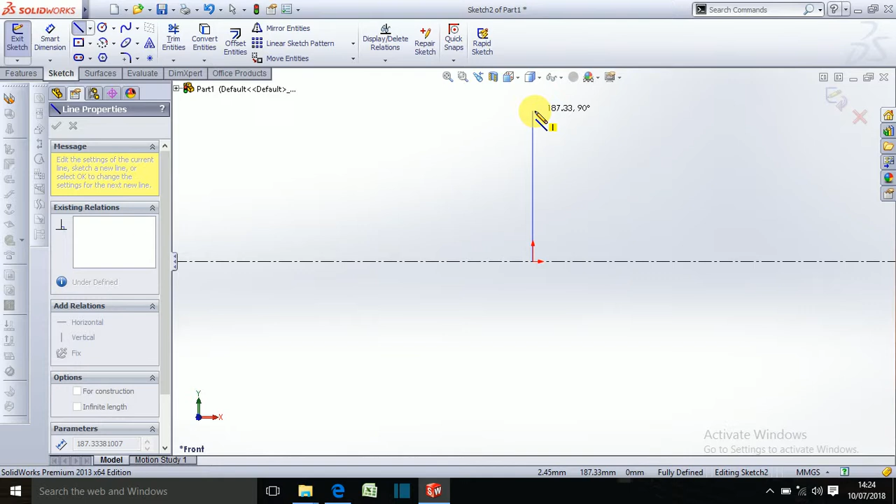Now just take a line from this point. Okay, again take a line from this point. Okay, let me just...

This distance will be of 32 mm only. Okay, let me just zoom in, and this will be the entire length of 64.

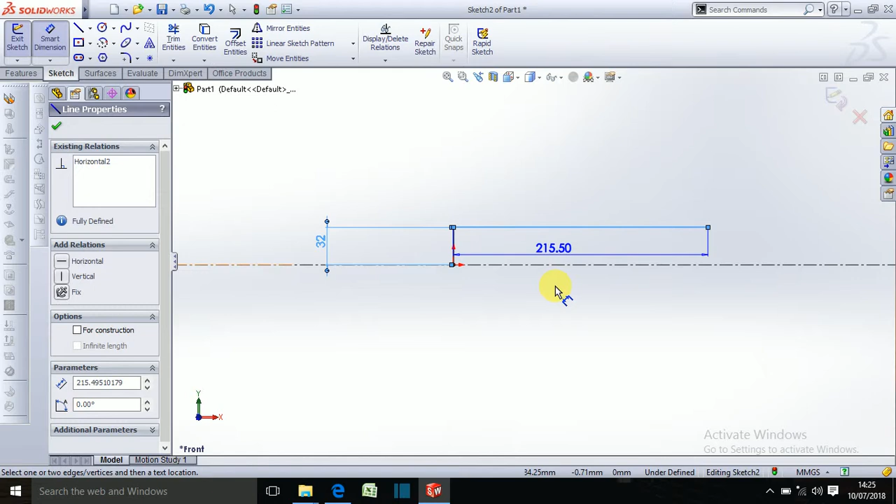Okay, yeah, let's just trim and leave this, and trim, use line command,

the line from this, and now draw the entities. Let's just take a center line from this point.

Actually use trim command first and trim this, sorry, let's just use trim and trim this line. Okay, let me just correct this.

Okay, now zoom in. Okay, much better. And now take a center line from the center of this line, to a reasonable length.

Again choose, actually yeah, again choose line command, and let me draw some entities.

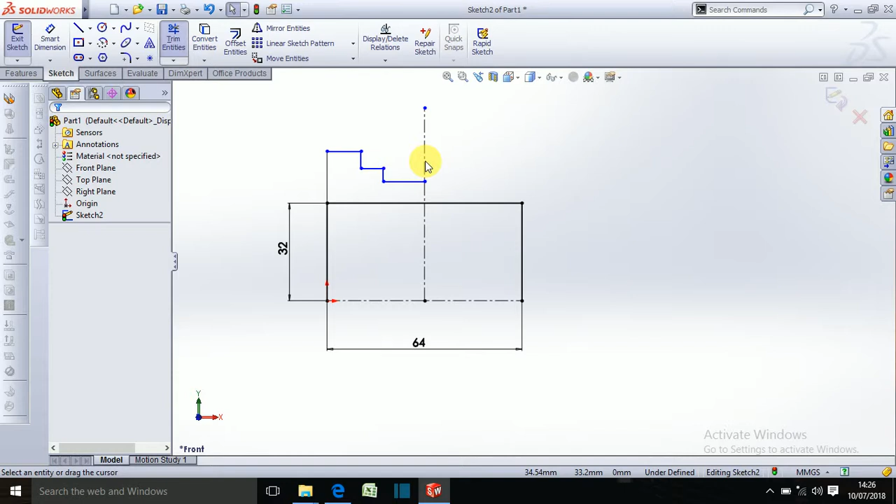Okay, just delete this line because we don't need this right now. Okay, now use smart dimension.

This line will be half of 64. Okay, delete this. Again choose smart dimension.

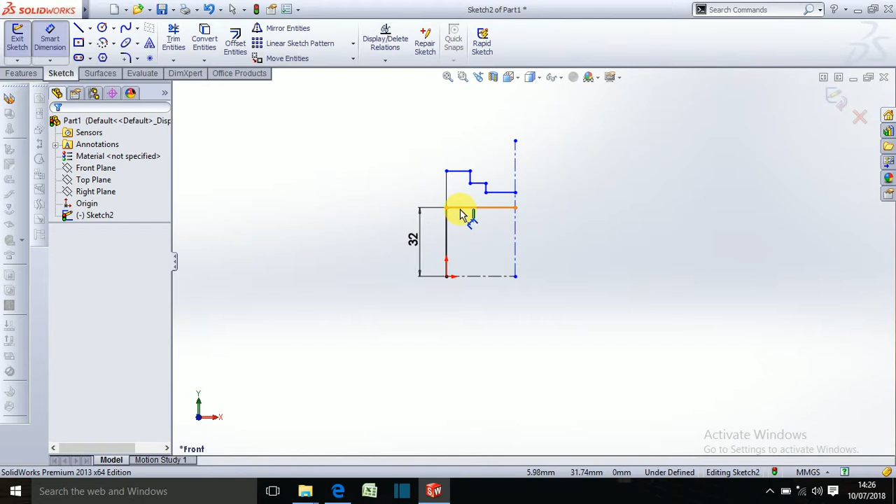This will be 32. Okay, now just delete this line.

Let me modify this. This line will be of 16 mm. And the distance from this point to this point, let me just take a smart dimension again.

Distance from this point, from center line, this will be 32 mm.

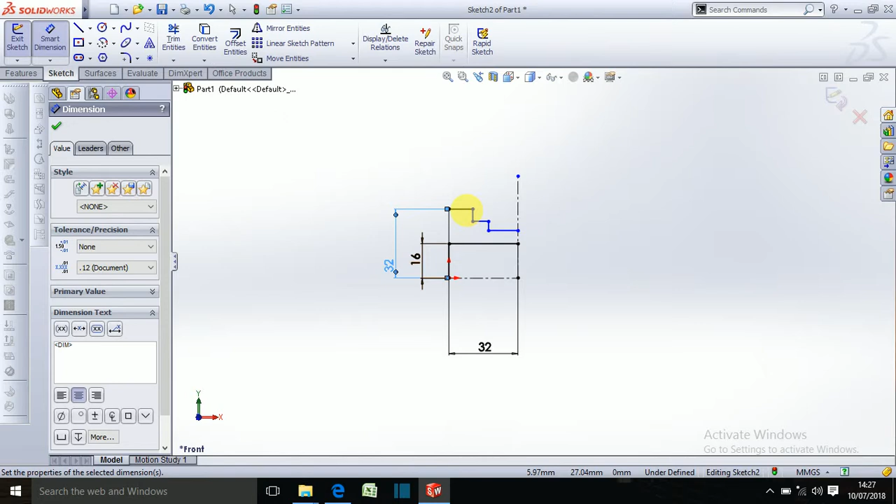Okay, again distance of this line will be 9 mm, and the distance of this line from the center line, this will be 23.

Actually it's 23, so we don't need to justify this. Again use smart dimension, and the distance of this line

from center line, wait for a minute. Okay, I just verify the distances, and the distance from this point, from center point, will be 24 mm, half

of 48, because 48 diameter we have given. And the distance of this point from the center point will be 22 mm.

Okay, this will be 22 mm. Okay, enter. Then again choose this line.

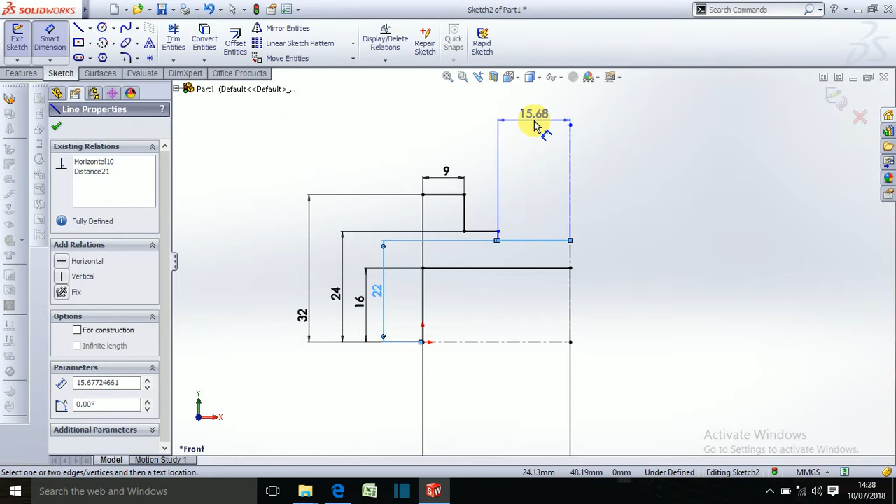The distance of this point from the center point is 14 mm, and the distance of this line from center point, it's 23.

It's already 23. So basically this will be the, okay, let me just delete this. Okay,

Now choose mirror entities, choose the entire drawn surfaces, this line also, mirror about, and mirror these entities over this point.

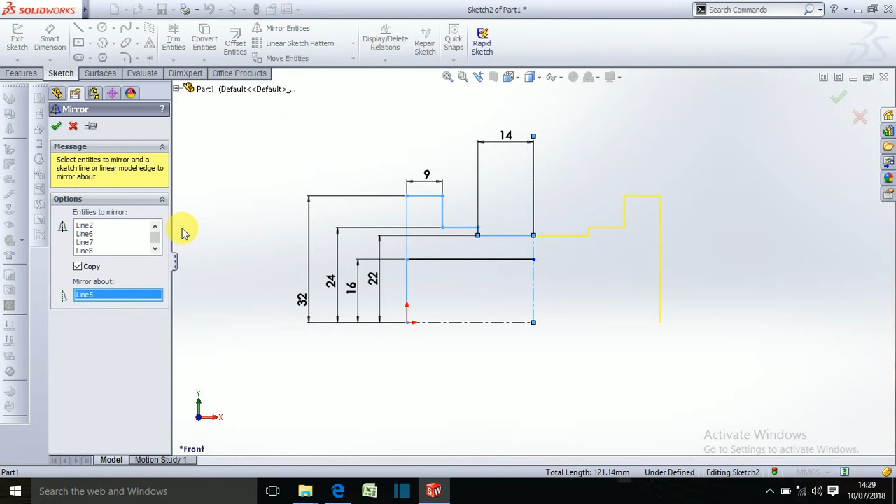Okay, again choose, let me just choose a center line from this point, and join this point.

Okay, so this will be the full defined drawing. Now just use feature.

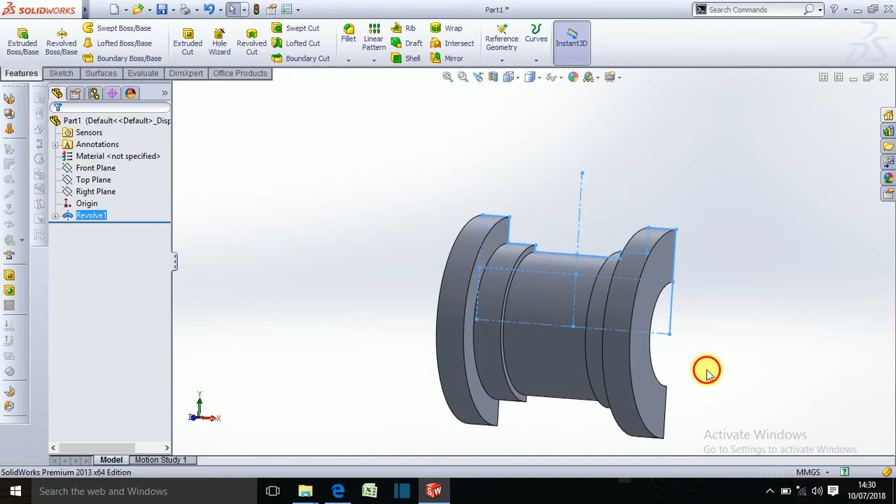Okay, so this will be the final part. Now as per the drawing, let me see the drawing first.

So we want a hole over this surface. This is the top view, so we want a hole over this of 8 diameter and 6 mm through.

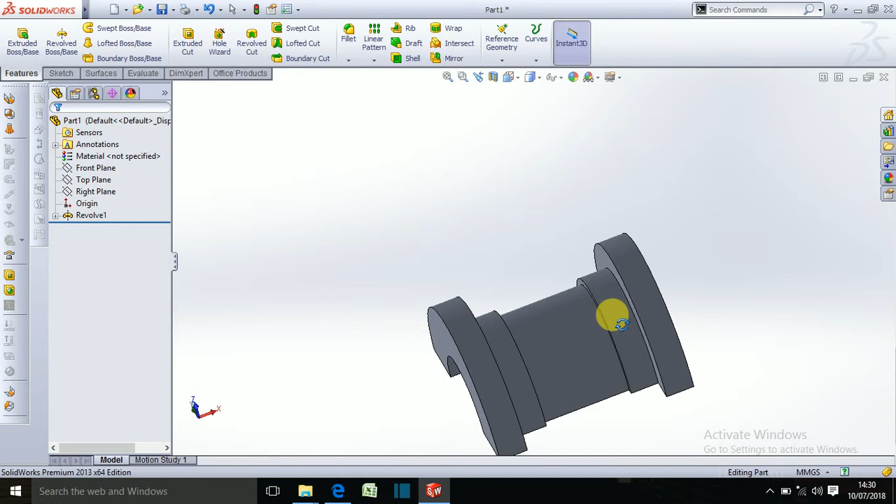plane, then choose the reference point. The reference point will be this surface, because it is properly defined.

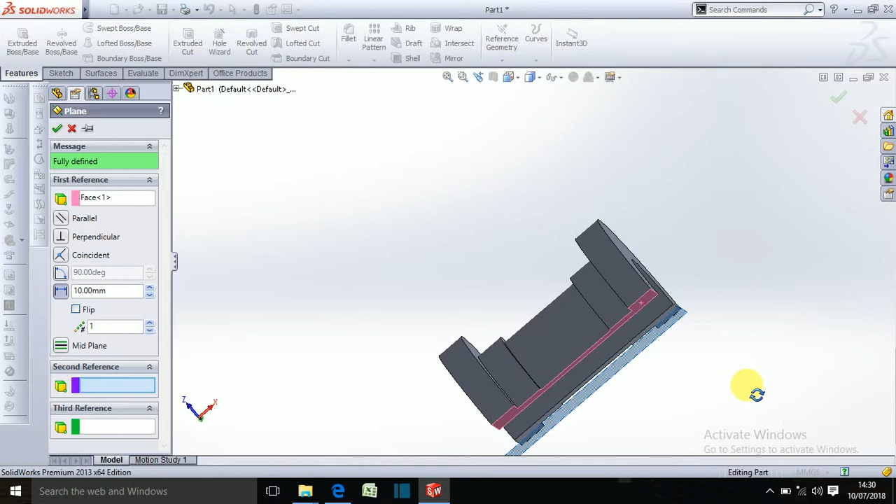So I choose this, and I want the plane in this direction, so flip it, and the distance of the center point from the center point to this line will be, I think, 16 mm.

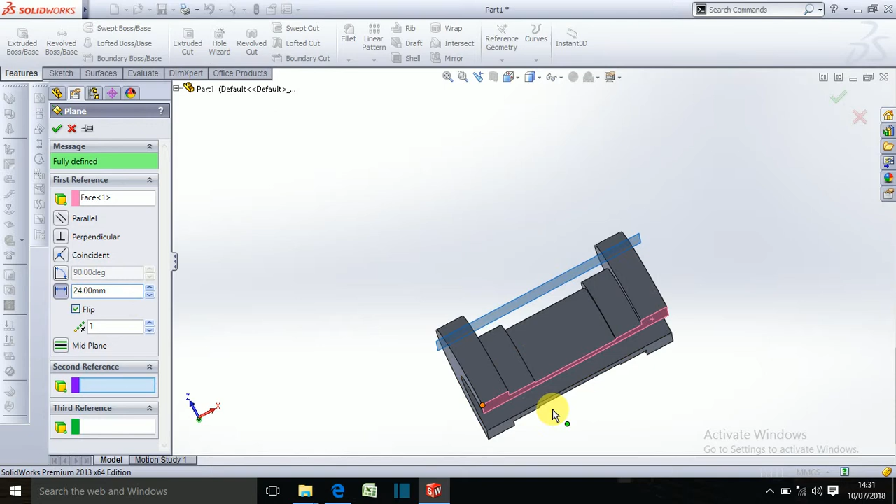No, it's not 16 mm, actually it is 22, I think. Okay, 22 mm, 22 is a little... it still looks a bit too high up, so we will check this again. I think it will be 24 mm. Okay, 24 mm makes it go even higher, so we will use 22 mm instead of 24 or 22. Let me just check on 22. Yeah, it is okay, select okay.

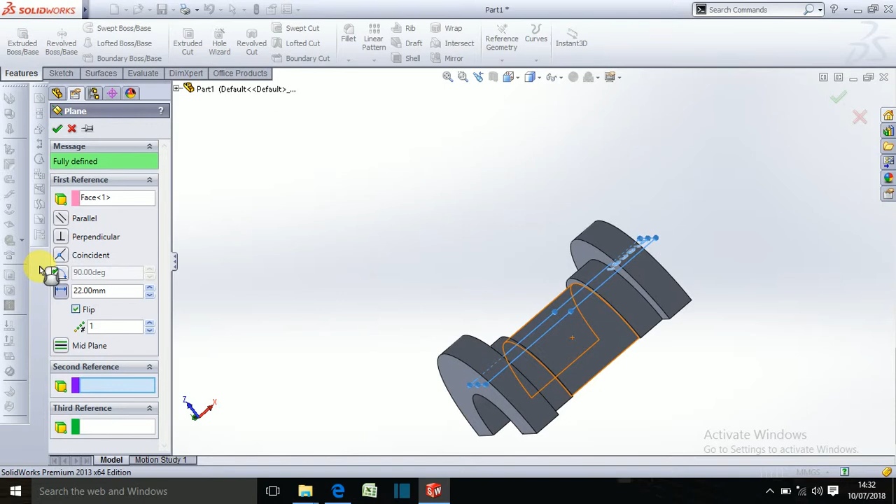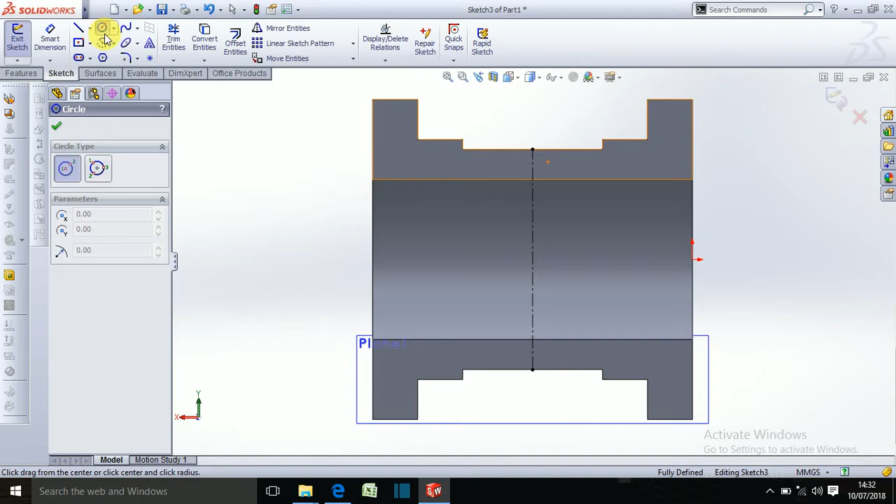Okay, now choose plane 1, sketch, and normal to it. Now just take a center line from this point, from this line to this line. Now just take a circle over there, over the mid point, and the radius will be 4 mm.

Now we want to extrude cut this over this surface in downward direction, so use trim command, and delete this line, actually control Z. Go to feature command and extrude cut. So we need it in the other direction, so flip side to cut, or we can directly select here.

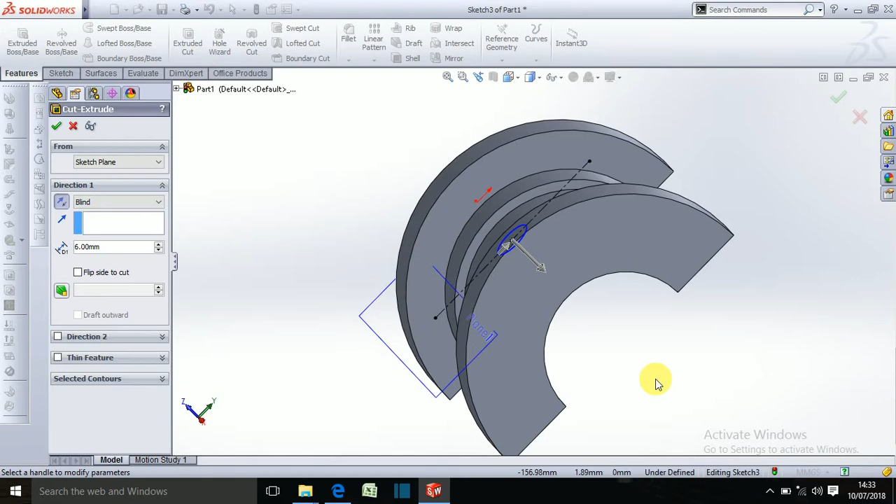This will be much better, and now we need the distance of 6 mm only. Instead of 6 mm, I think, okay, we will select first the surface, choose center, choose the circle.

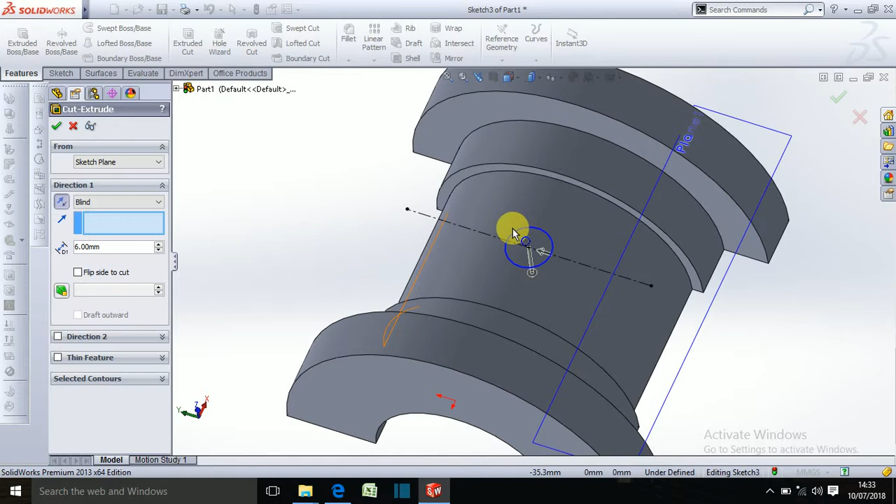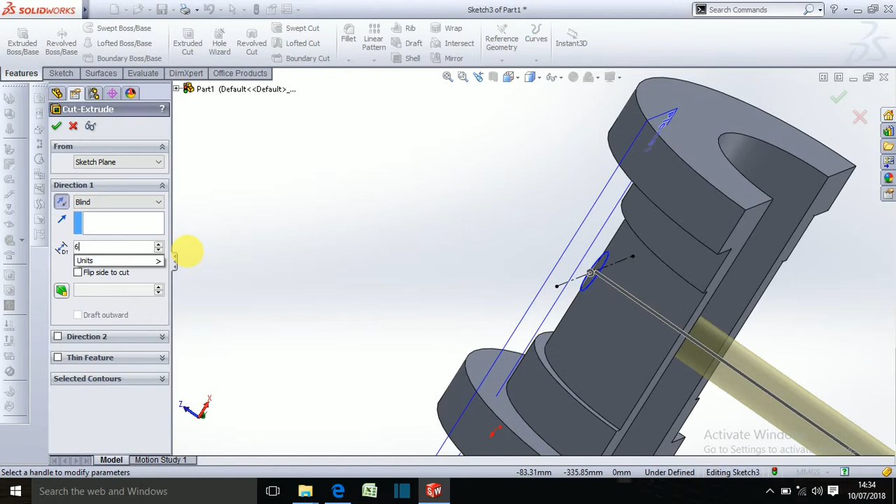Not this face, actually delete this and select Blind. Okay, 6 mm, need this 6 mm, 6 mm in opposite direction. Sorry, it will be 6 mm. Or we can select through all. Just select this line and okay.

Okay, now just select this plane and hide it. So this is part number 2, and the third part will be the same, just a simple modification. Let me just save this, save. Part 2, part 2.

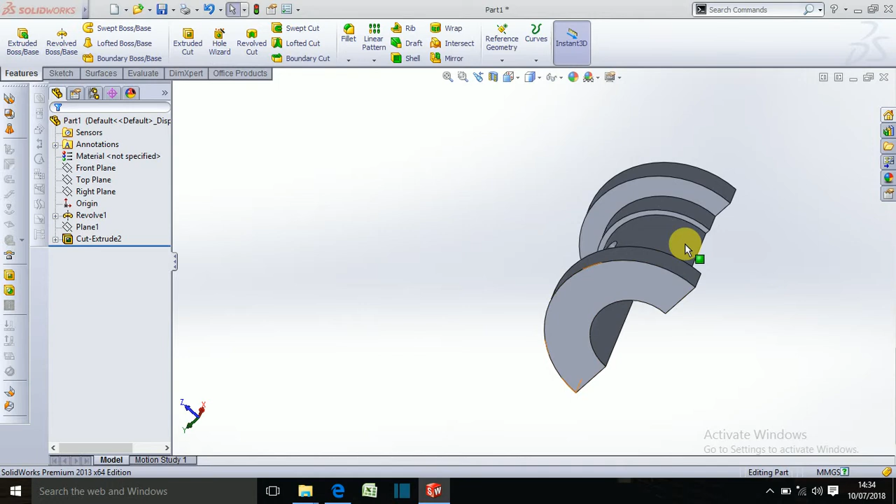Now we just need to extrude. We will just cut extrude. We delete this sketch, again delete this. Okay, now use sketch 3.

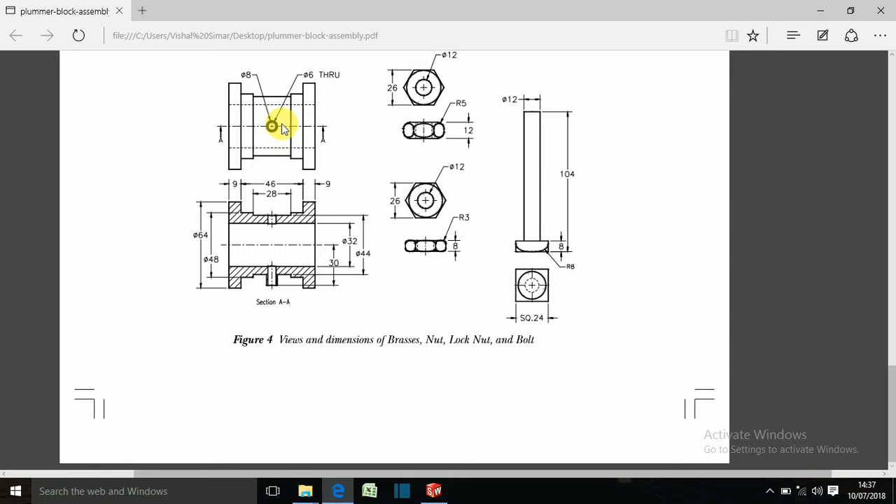So we have to draw 2 circles over this point and then extrude this.

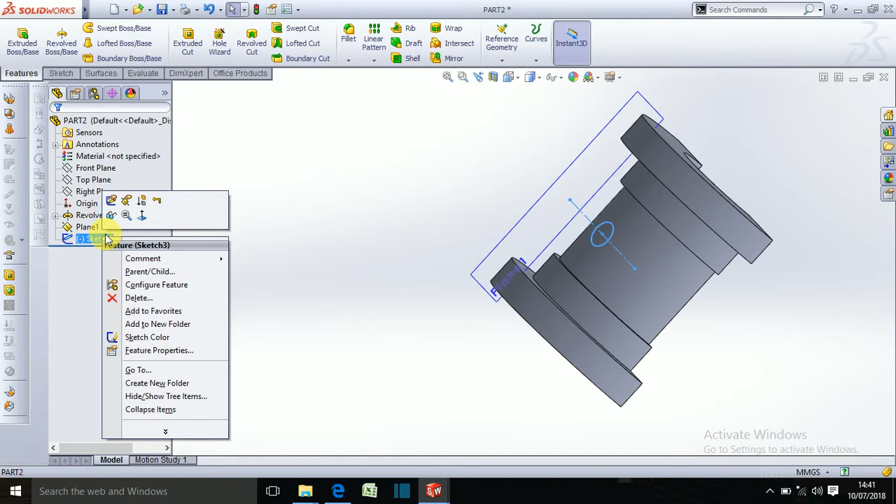Now we have just to modify this sketch. Again choose plane 1. Sketch, again sketch, show, and sketch. Sketch 3. I did sketch 3 actually. Edit, okay, normal to.

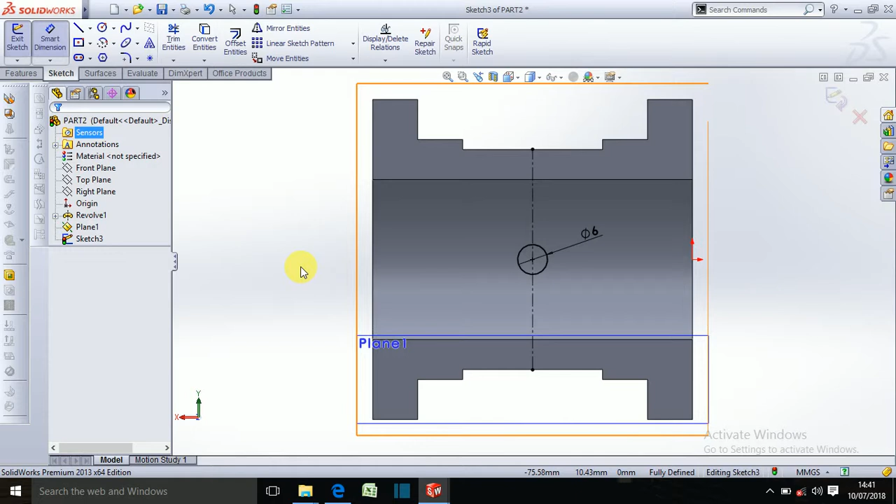Use smart dimension, and this will be of diameter 6 now. Okay, exit sketch, use extrude cut.

Select the sketch. Yes, okay, and about this point. Now again choose plane 1, edit sketch, normal to.

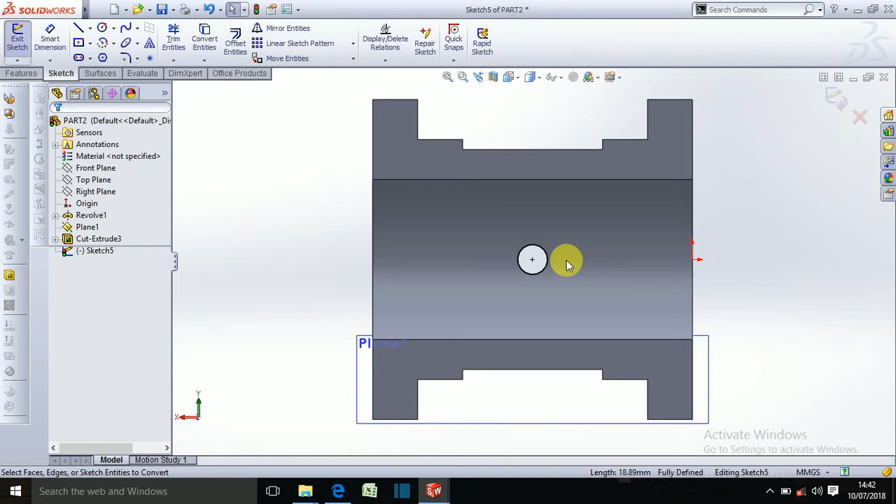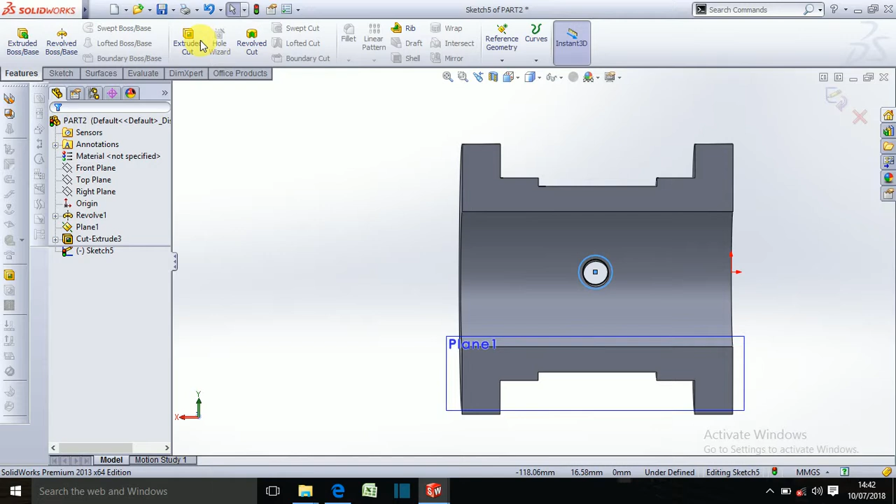The diameter radius will be 4 mm. Okay, and then feature and extrude base. So yeah, okay, change the direction to this side, around 6 mm. So I need only 6 mm. Yeah, okay.

So this is the simple modification which we have made in part number 2. Let's just hide this plane. Okay, hide this. Again, this is a simple part, we just made a simple modification in this. Let's just save this part as part number 3. Save as part number 3.

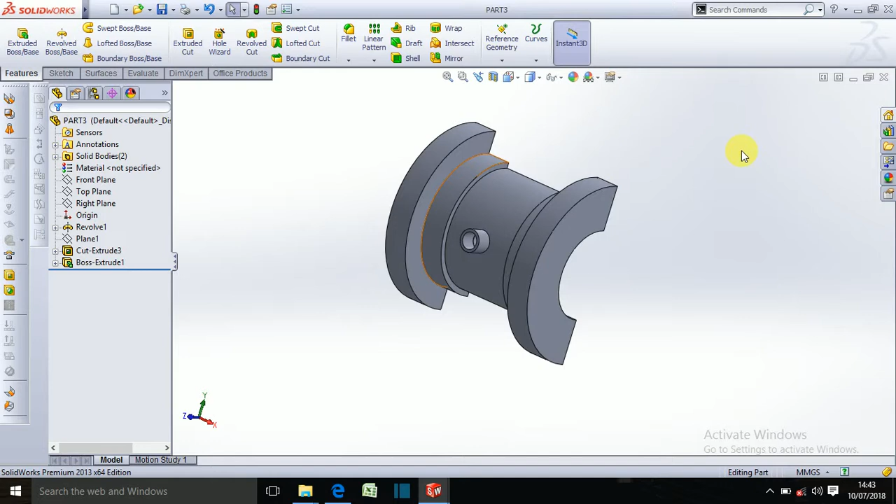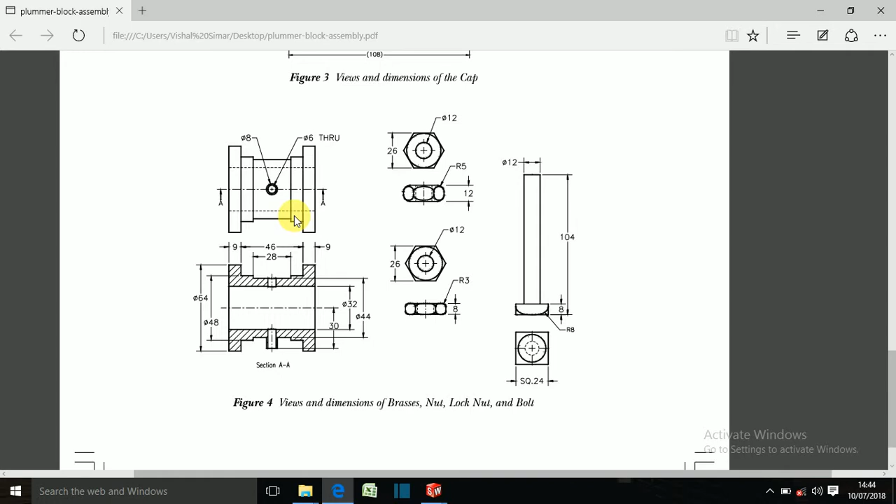Again let me choose a new part. Okay, just use sketch, and sketch, and choose whatever plane you want to choose. Now just we can have a look at the drawing. So we have made this part, this part and this part. We have made 3 parts already. Now we just have to make this cap, nut portion and bolt portion.

Okay, so on this cap of the surface, this is the front view of the cap and this will be the top view of the cap. So let's just start. Choose smart dimension, sorry, SolidWorks, new part.

Okay, now just choose a line from this point to this point. Make that line horizontal.

Now the dimension will be around 108 mm.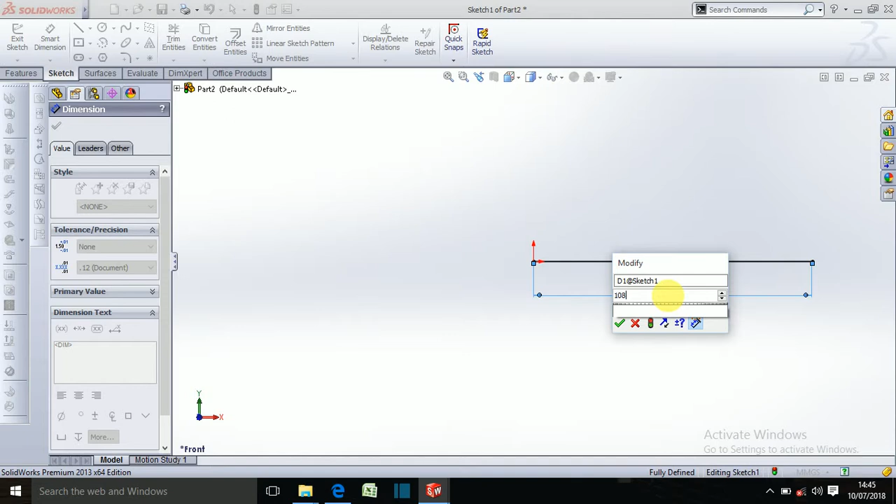Now just take a line from this point. Actually take a line from this point. Let me correct this, make this upward.

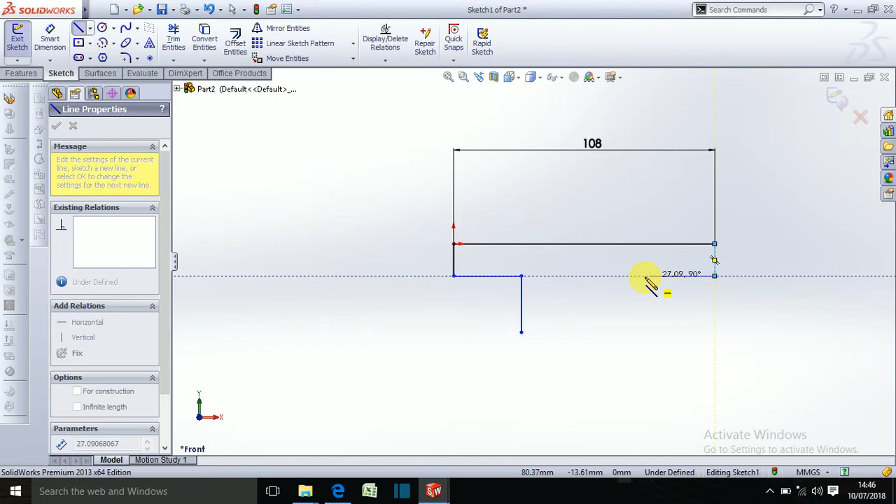Let's just take a line command again from this point. Select, again choose a line command over there, and just do that. Let's just define these lines.

This is 108, and this will be 12 mm. Okay, this also will be 12 mm, or you can just...

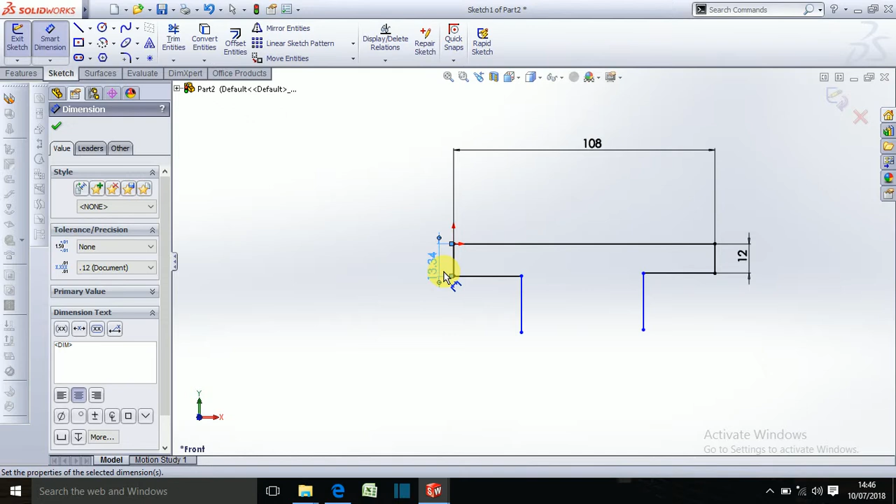Delete this. You can just select this line, first escape, select this line, press control, select this line, make relation equal. Again choose this line and this line by pressing control and make relation equal.

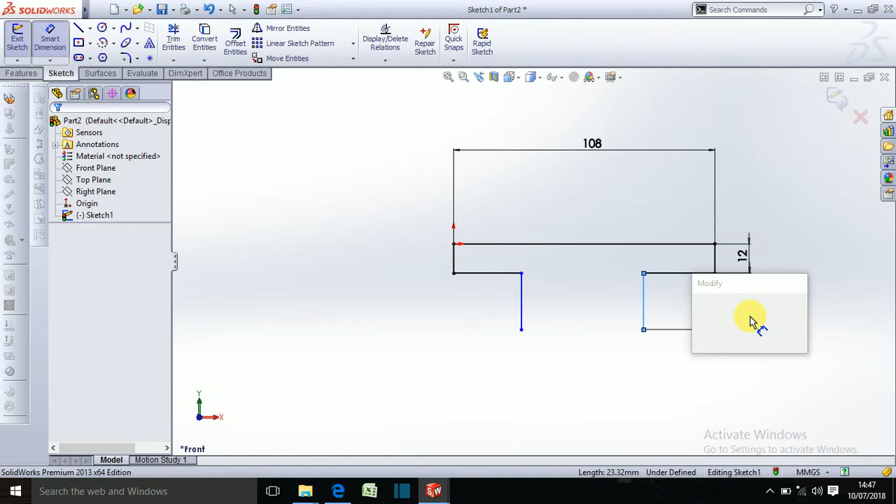So now just describe this line. This line will be of 16 mm.

Now we just need a center line from this surface, so this will be the center point. We just need a random center line, make this line vertical. It's vertical. Let me just zoom out.

Then now from the center point of this line, let me just define this line. From this point to this point, the distance will be half of 56 divided by 2, 23 I think, or 28.

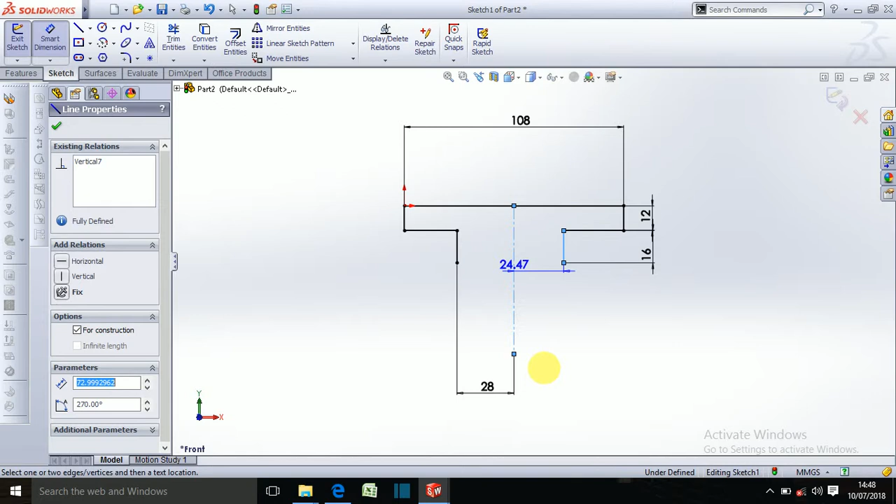Okay, yes, it will be 28. And the distance of this line from this line will also be 28. Now everything is defined.

Now we just need another line from this point to this point. And another line from this point to this point. Okay, now let's take...

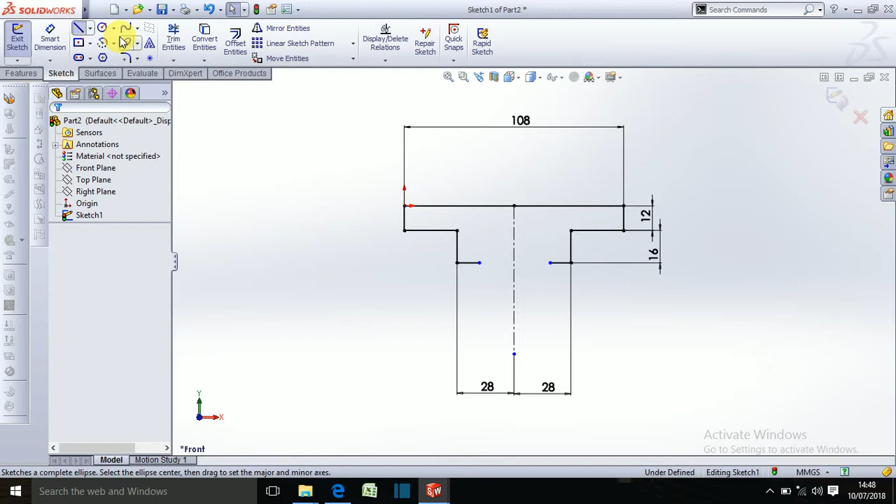Now take a circle over this line, this center point line. Now take smart dimension, and the distance from this line to this will be 8 mm.

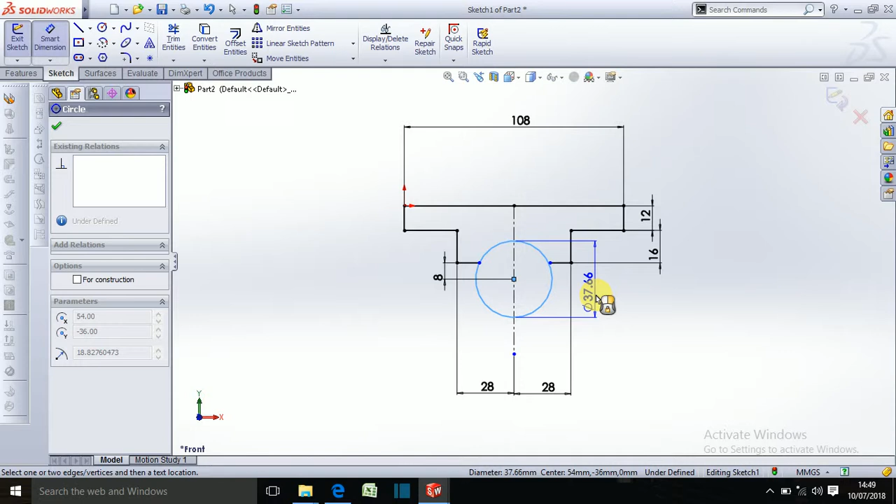Actually just trim this line first with control Z. Just take a center line from this point. First control Z again, and just define this circle.

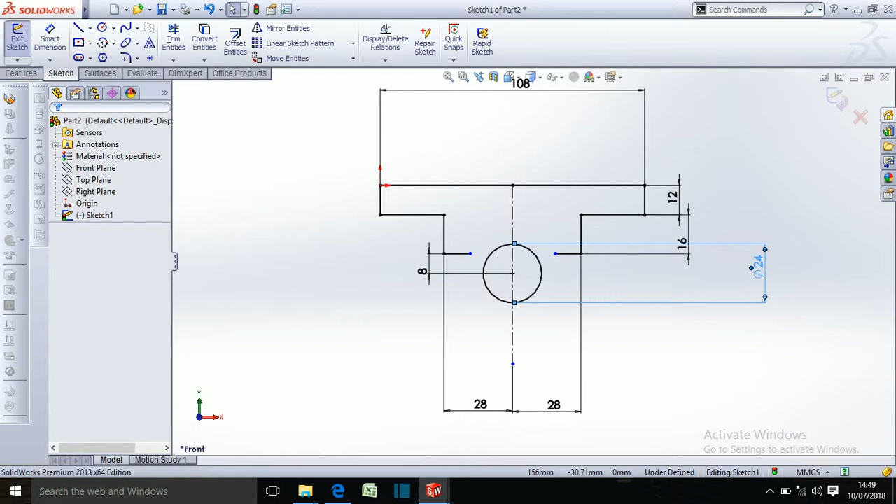So we just need this of radius 24. Sorry, it's diameter, so we need double of 24, into 2, it's 48 actually.

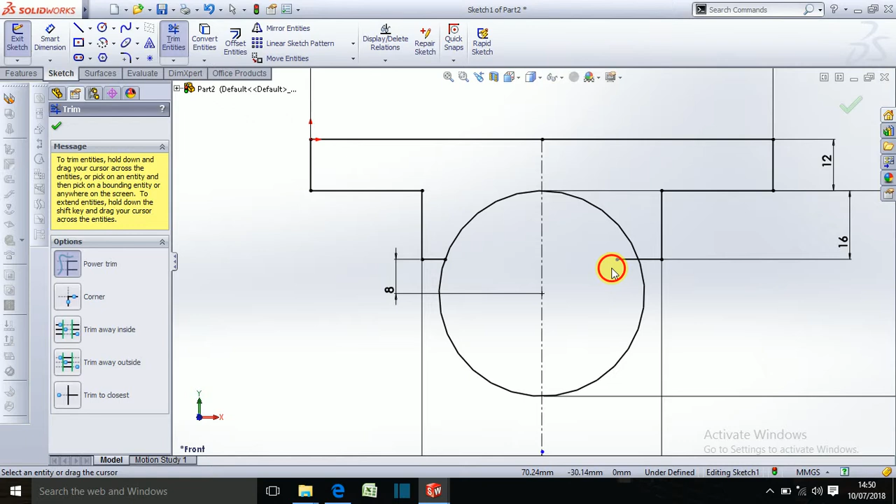Then just use center line command and just join these points. Just trim first this point and this point, and again this point, this point.

Again choose a circle command over this point. The radius will be of 48 actually, so okay, command.

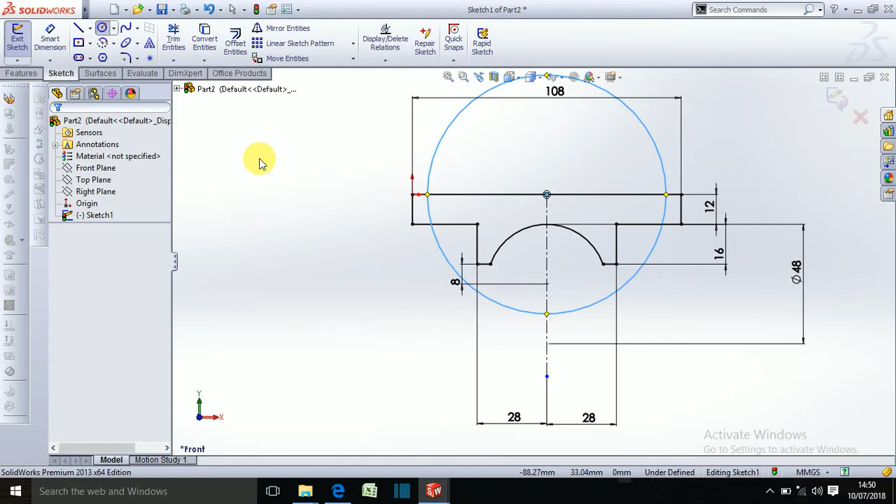The radius will be 48, from this point, not from this point actually. Just delete this circle. We have to take a circle from this point of 48 radius. This will be the circle.

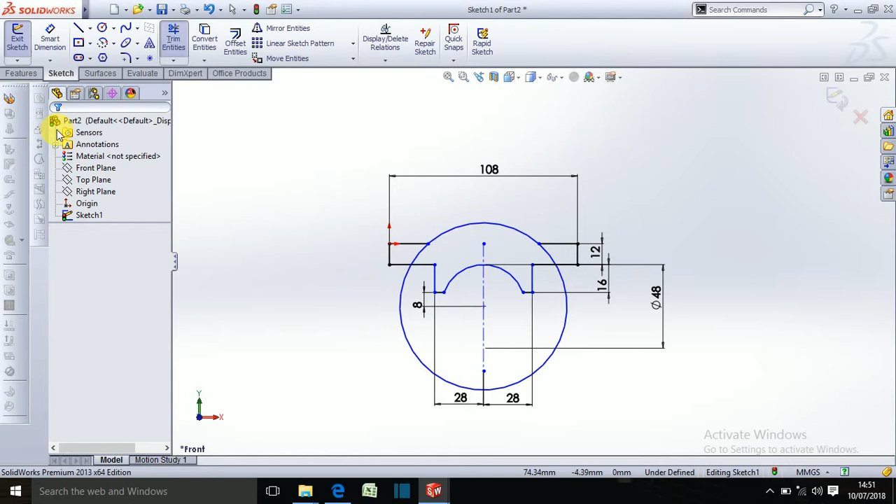Again choose trim command, trim these lines and trim these surfaces also. Again choose trim command and try to trim these.

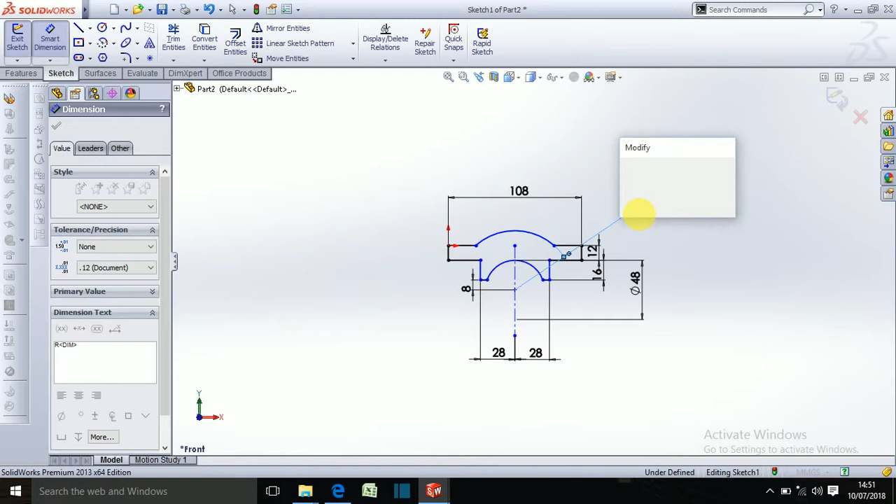This will be the complete drawing I think. So just define this, this will be 48 radius. And this will be 24 radius. Cancel this.

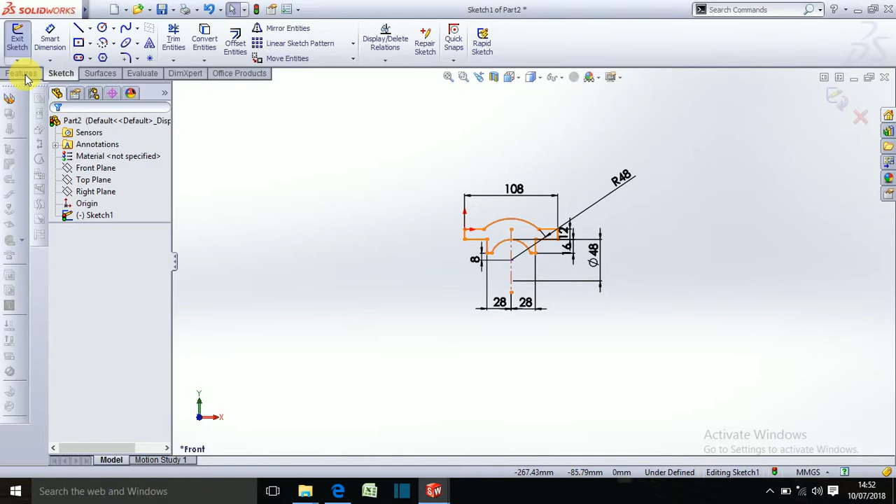You just need to extrude this part. Exit sketch, use feature, extrude. The distance will be 46, either in one direction, or you can choose mid plane, whatever you want. So this will be the part, upper case, of our plummer block assembly.

So let's start. Let's just take a sketch of this. Sketch normal to. Take center line...

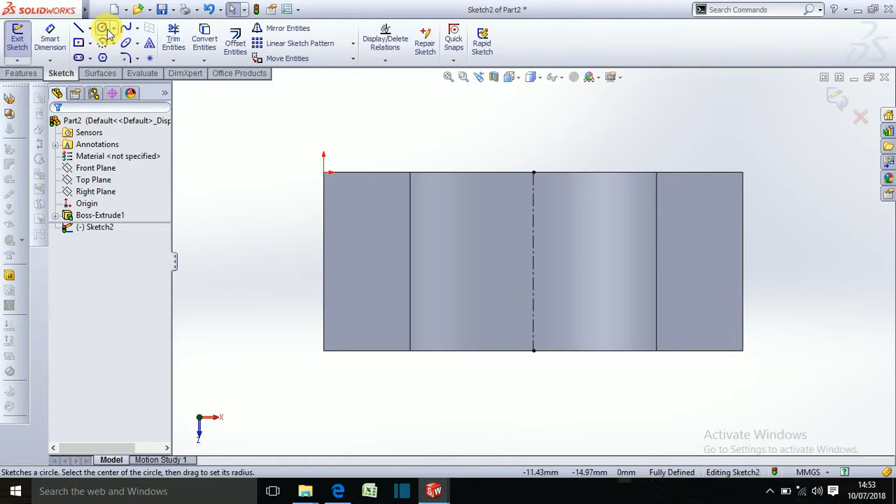Now choose line command from this surface to this surface and this surface. Again choose line command, make that point from this point, from this point to this point and to this point.

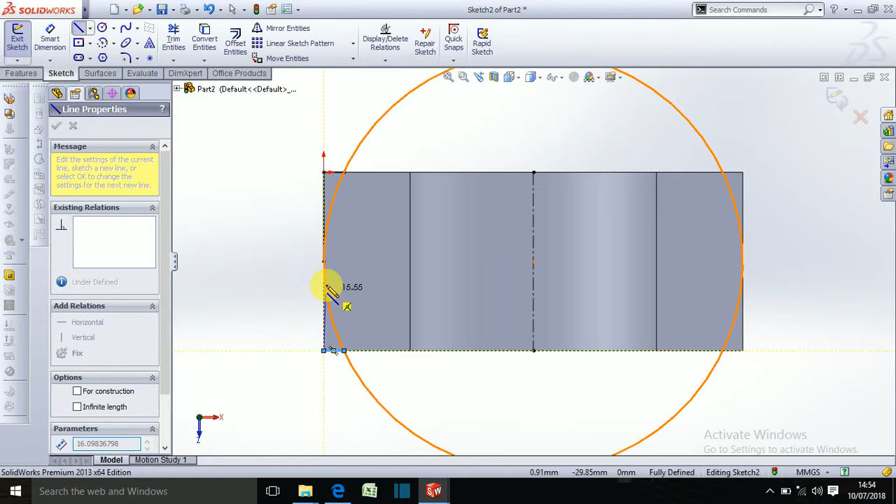Again choose line command and do the same for this surface, or you can choose... okay, it's conflicting something, let me just delete this line again. Let me just delete this one also. Delete. Now just select this line...

Sorry, line command over this surface. Again choose this surface and to this circle.

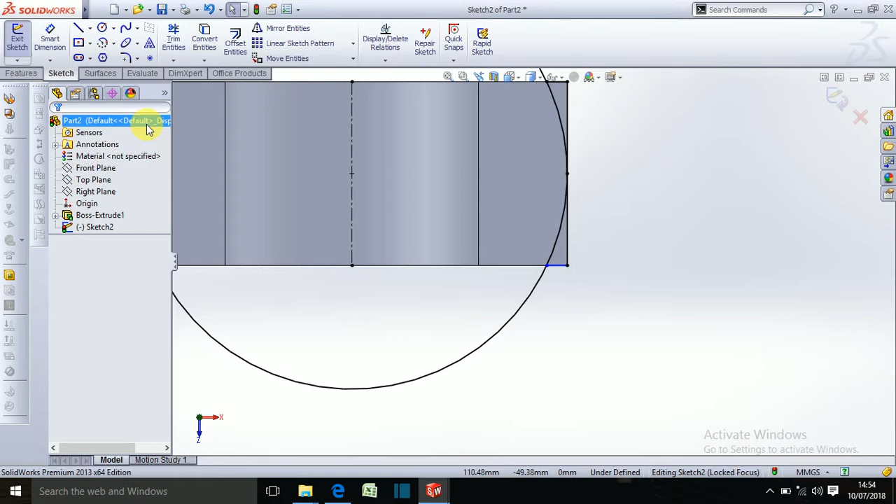Let's just take trim command again and trim these entities which we drew. Let me just mirror these entities to draw. Actually first check trim surfaces. Use trim command.

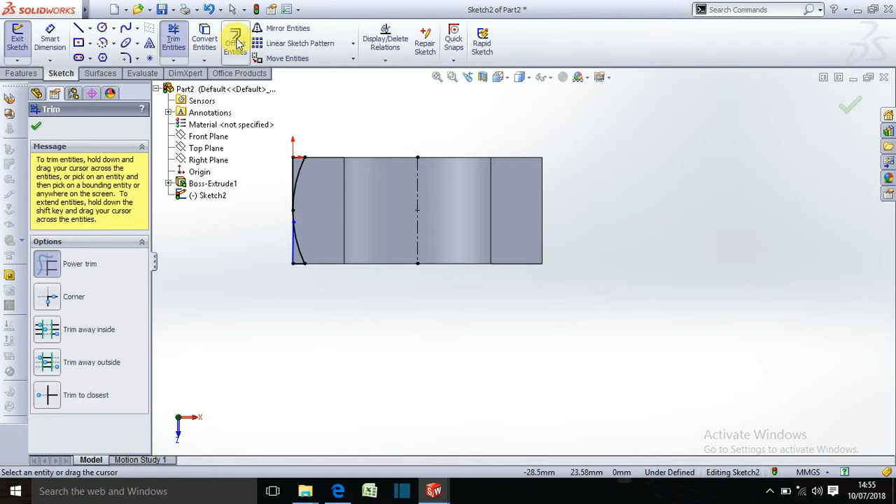Again choose mirror entities to mirror. Choose these entities and mirror about the center line.

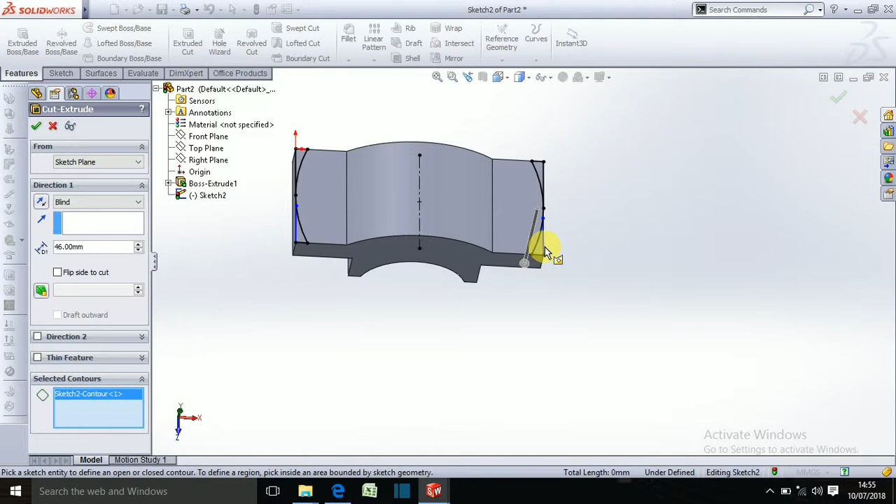So now we have to extrude cut this. Use extruded cut and choose the surface. Select contour, again clear selection, Blind, and now select the surfaces. Clear selection, again choose sketch.

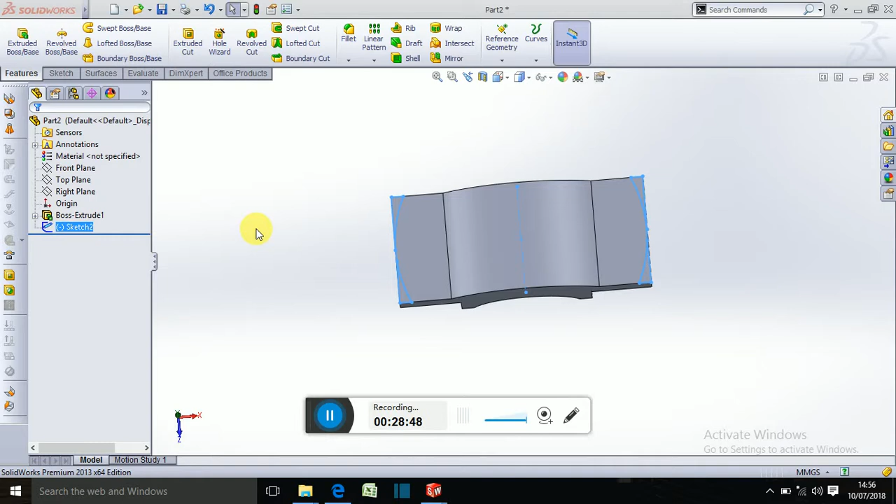Actually this is not a closed surface, so we cannot select this. Let me just correct this one. So guys, I just verified what is wrong.

Now I've made these lines, let's directly mirror them first. So just use the mirror command and select entities like this line, this line, and this line. Mirror about the center line, about this point.

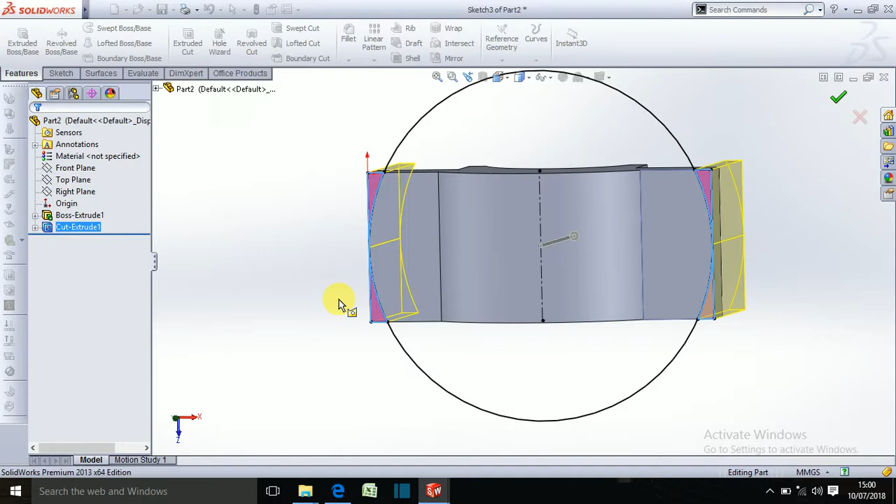Normal To. Now just choose a center line again from this point to this point. Now choose a circle, draw a small circle over here, draw a circle over here, and exit. Again press Ctrl and select these two circles. Make them equal.

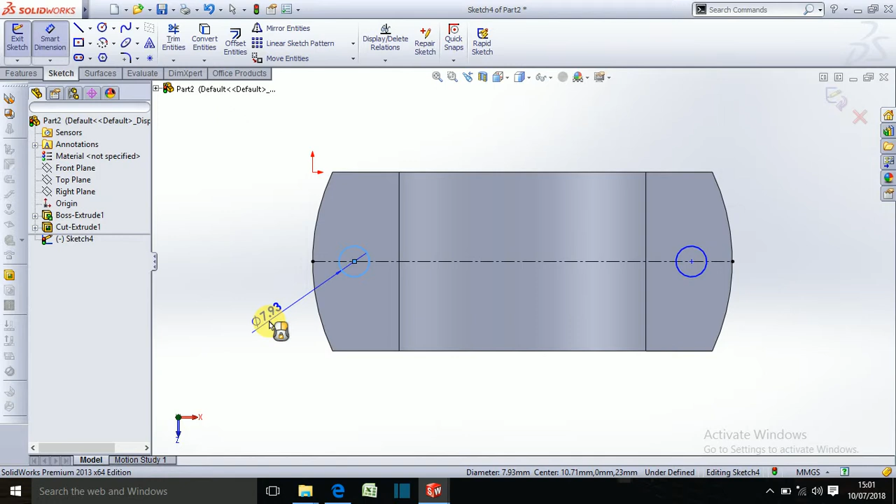Now we just need to give dimension to it. It's through all the surfaces and the diameter is 12 mm, so radius will be 6 mm.

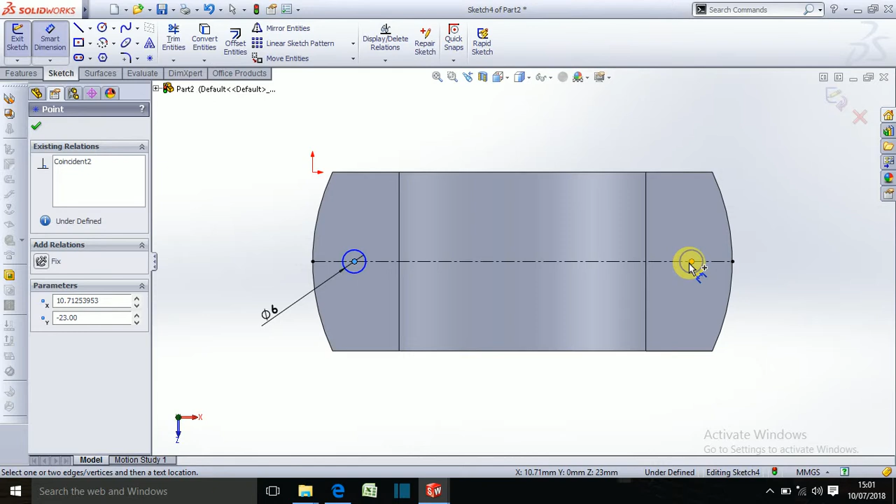Now we just need to define the distance from these points, the center point of the circle. The distance between these circles will be 39 plus 39, or you can say 39 into 2.

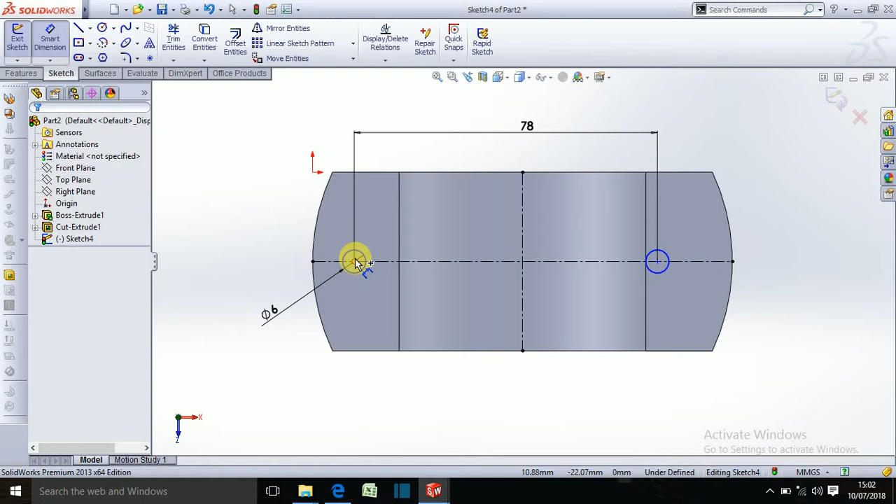That's 78. Again take a center line about this point. Again choose smart dimension, choose either center of the circle and select it as 39.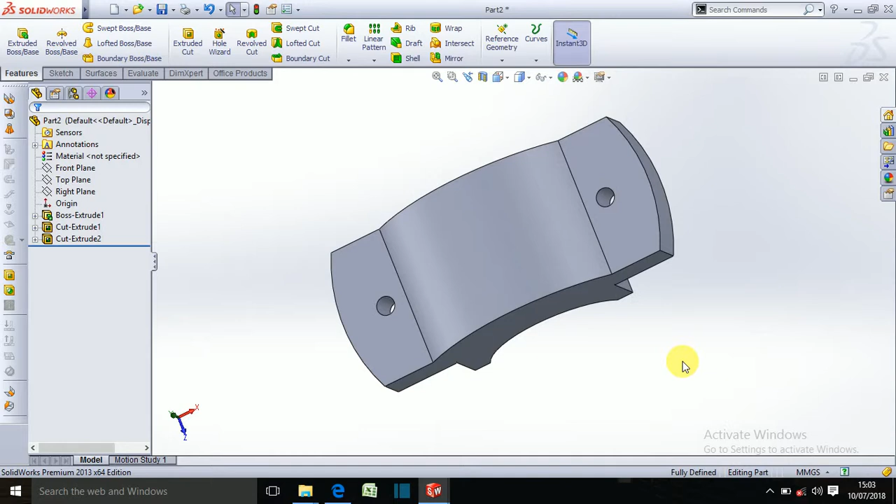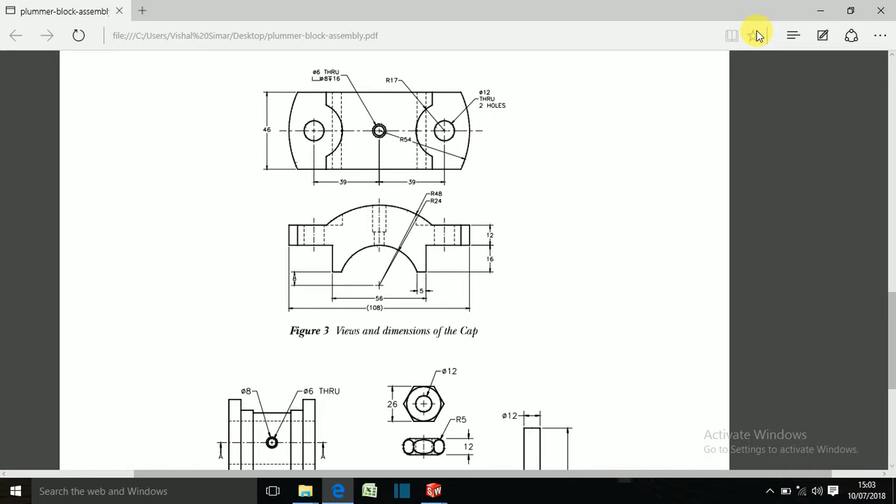Now just take a look at the drawing. So basically we have made these holes now. We have to draw a fillet, or we can say a surface over there, or first we can draw these holes on the surface. So let's just try. Select this surface, sketch.

Exit sketch. Actually we have to make - just select this surface, exit.

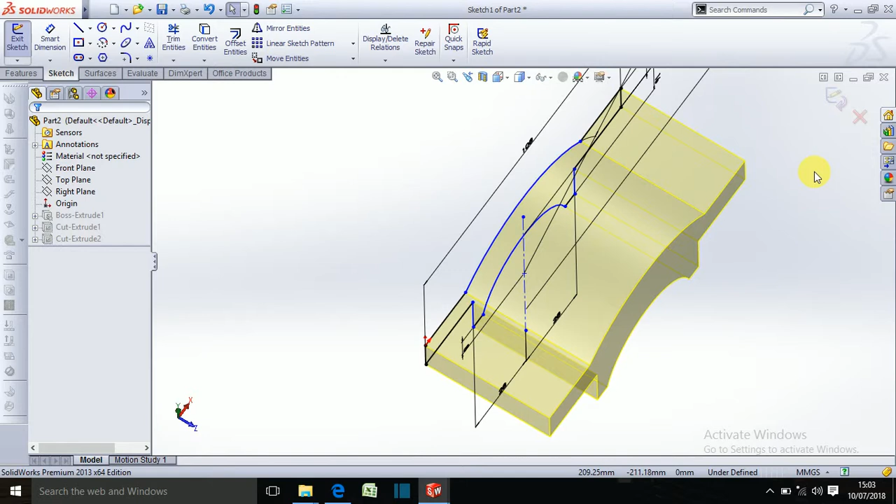Let's just take a reference geometry plane. The first reference will be this plane. We have to take distance - let me check - 48 from this point, 12. Let me just flip this surface and set it to about 6 mm.

So as you can see, I have taken a plane in the middle of the surfaces, because I will draw an entity over here and then extrude cut over this surface in the upward direction. Let me just sketch this surface again, normal to.

Now just take a center line from either of the points. Now take again - this will be the 4 mm radius.

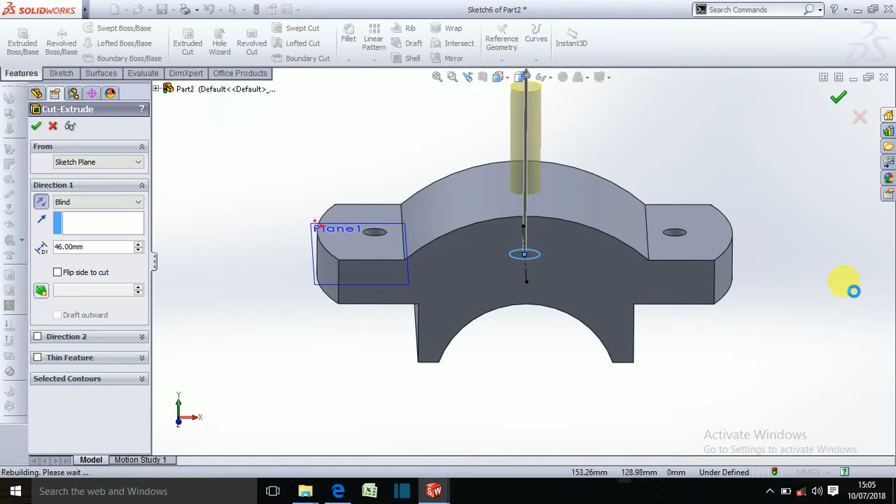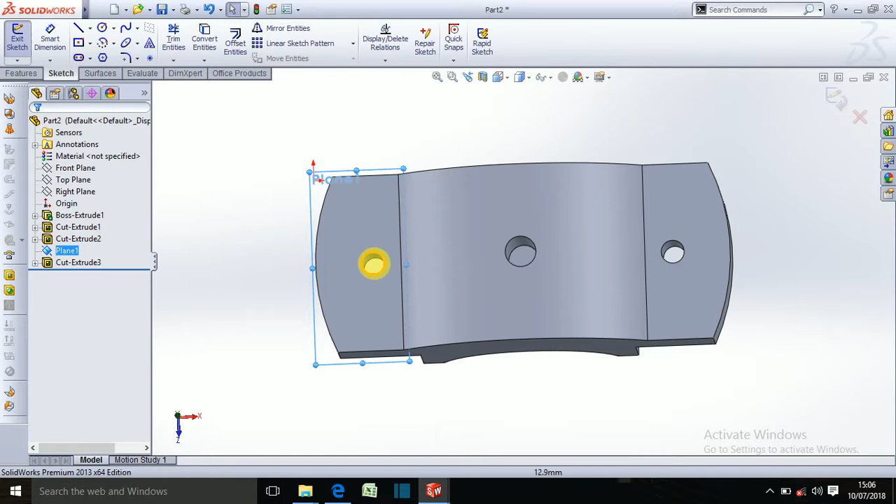Again choose this point, or I can directly sketch right now, or we just exit sketch, again choose plane 1 and sketch normal to and use convert entity.

We don't need convert entity, actually we just need a circle over this surface. So at this center point we need a circle of radius 3 mm.

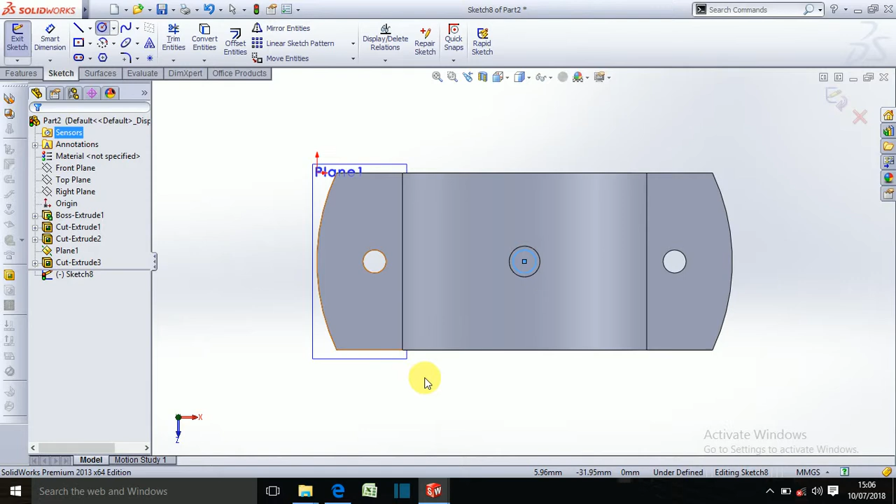And we just have to cut this surface, extrude cut this through 16 mm.

So this will be - firstly I think just hide this plane. So this will be part number 4 of the Plummer block assembly.

Let me just save this. Part number 4. Okay.